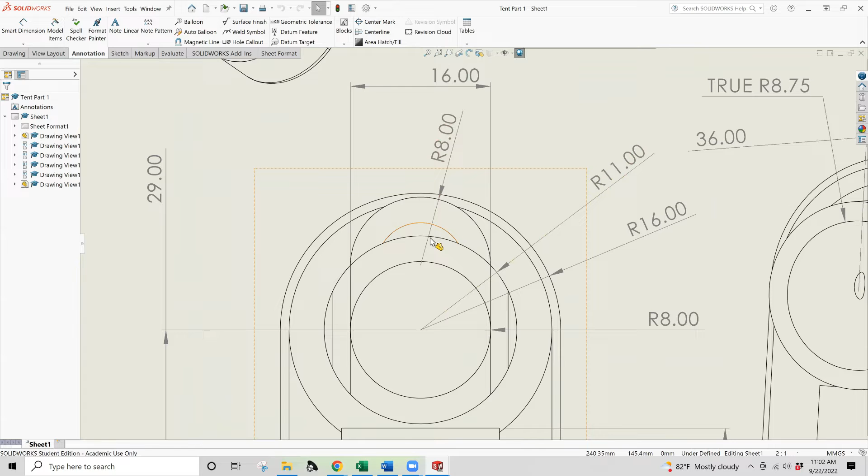So we're going to start by looking for a side view, a top view, an end view, something that gives us information. And we want to pay attention to what these symbols mean and where the arrows are pointing, because all of that information is very important for how something is defined. So up here for what would be a top view, we have a dimension listed here, 22 millimeters as the outside.

Now out here, we have a different value, and we don't know exactly how thick this is from this particular view. So we'll figure that out in a little bit. But one of the things that we want to pay attention to is where this base extrusion is. So we've got our 22 millimeter diameter, and then we have a total length of 62 millimeters. So our overall length for the whole thing is 62 millimeters. So that's what we're going to start with as our base geometry.

All right. So because of the way that things operate, we're going to start a sketch. It's going to be on the right plane. I'm going to change views so that we're looking correctly onto our part. So even though we've specified a dimension here, we need to tell it this is a 22 millimeter diameter circle. Then we're going to need a couple other pieces of information. And this is where you can just hurry up and extrude. But I want you guys to start learning as part of this process.

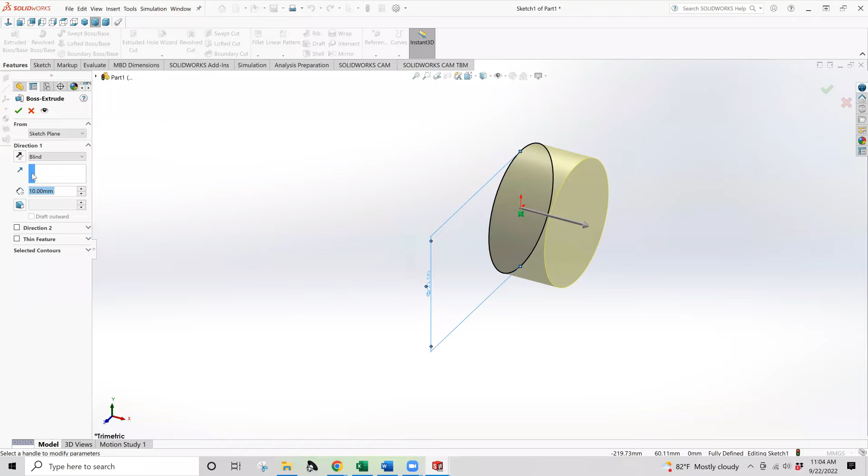Again, we're trying to scaffold different layers of learning into this process, so that you don't really have a sense of all the things you're learning at the same time, but they're all going to work together. This is an okay starting point, but I want you guys to vote in the chat. Is this the best starting point, or should we try and collect a little bit more detail in this first sketch so that we can do more at the same time from a base sketch? Let's take a vote.

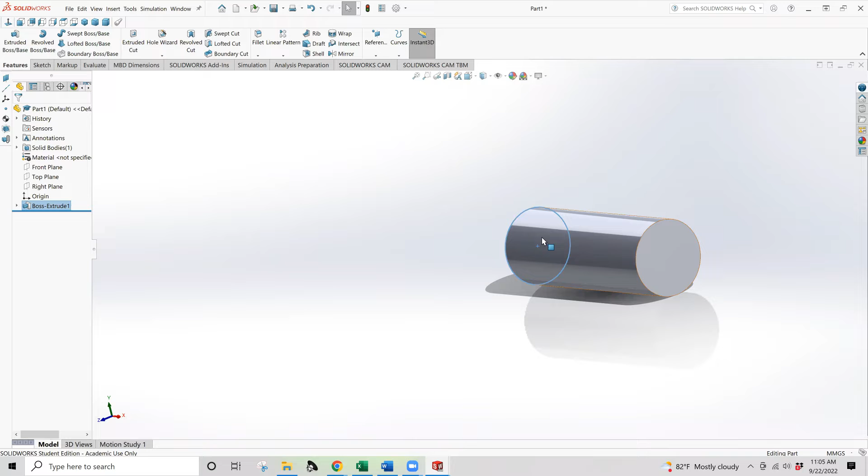Yeah, so we should definitely do a little more detail, right? Because this cylinder looks really not much like our existing part, at least not yet. Okay, so let's go back and edit that base sketch. Again, we're going to reset our view. All right, so we've got our base sketch. We move this toward the center. Here we go. So that stepped me out of the sketch. I'm going to redo our base view here. There we go. All right.

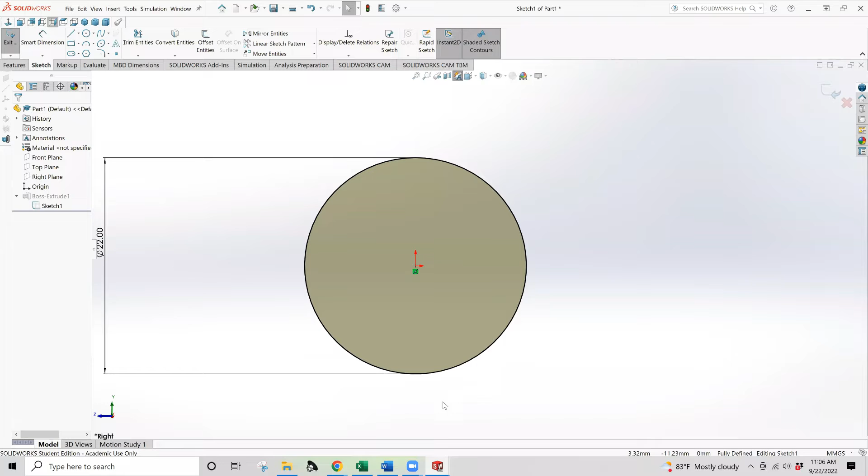Every once in a while, this particular mouse does not register the clicks. Careful with off-brand Chinese mice. Maybe just avoid all of those on wish.com entirely. It's not where this one came from, but I'm told those are not high quality parts.

All right, so we need a couple other features. Other features that we want to include are, let's think a little bit about these two.

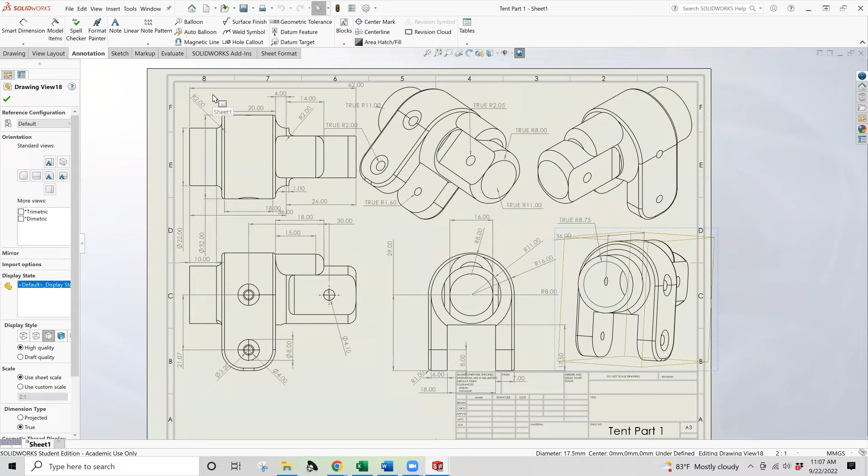So here and here, we have some important details, but we want to think about what is it that makes these so important? How is it that these are giving us information? Well, one of them is we have the radius for this interior, right? So the depth for that first extrusion is listed up here at 62 millimeters. So that extrusion height is 62 millimeters.

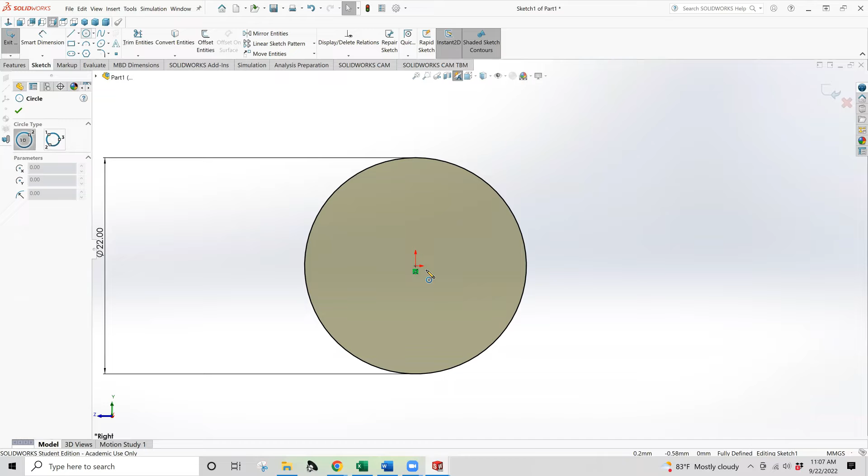We're going to work from this interior or ID, this inner dimension, inner diameter. They're used to mean a few different things, but it's all the internal dimension of that object. If it's a circle, it's probably referring to diameter. So this is 8.75 as a radius. That's what we want to include as one of the next pieces here. So we need our interior sketch, and the radius is 8.75. Now, this gives us a little bit more usable detail. So 17.5.

Now, the next thing we need to do is we need to look and see what our, come on now, there we go. Every once in a while when you're screen sharing with Zoom, it does stupider things than you would expect it to know how to do.

There is another dimension here that's key, that's really kind of hard to see. And that's 36. It looks maybe like it's referring to this circle. And a lot of you on CSWA drawings are going to see something like this and get fooled, but you actually want to pay attention. And I'll zoom in here to make it real obvious what's going on. If this were referring to that circle, so I'll use green to denote dimension, what it would have to do is cross the center point of that circle, which is roughly about there or so. Now, that's not where this ends.

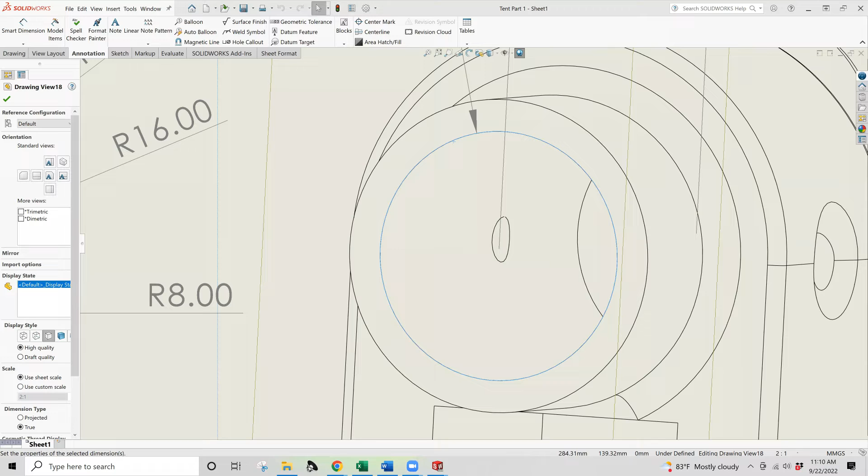This circle, however, if we bring this straight down, so we don't have any jagged lines, and we bring this sort of straight across about the midpoint here, that sure looks like the point right here. That's where this is actually measuring. So this is actually measuring from the center of this inner circle to over here, the center of this circle in the front. So that's actually the depth of cut for this. So there's a couple ways that we can approach this. And I'll show you one of them here.

We can use the same sketch to do a couple things by doing different kinds of extrusions in different directions. So let's look even just at what additional detail that one circle gives us as far as the mechanics of how the drawing is going to work for us. So if we just leave it at this level of detail, we can come back out here and, got to select that dimension, step out of the sketch because reasons. So we're going to do an extrude. And in this case, I'm actually going to edit this extrude. So first things first, I'm going to tell it we want you to take both of these regions,

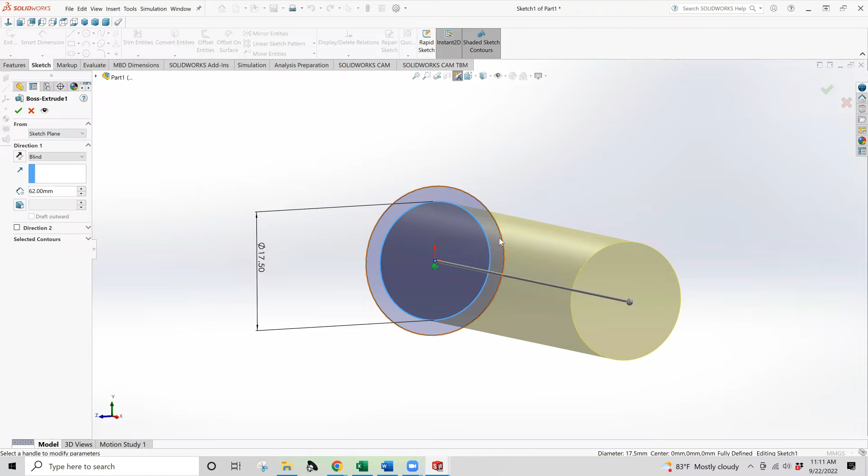and extrude those forward. But instead of the 62, we're going to do a little math. That depth was 36. So what's the difference between 36 and 62? Somebody that's still awake, let me know. Good. So 26. So I've done one operation on this sketch. Now I'm going to do another one.

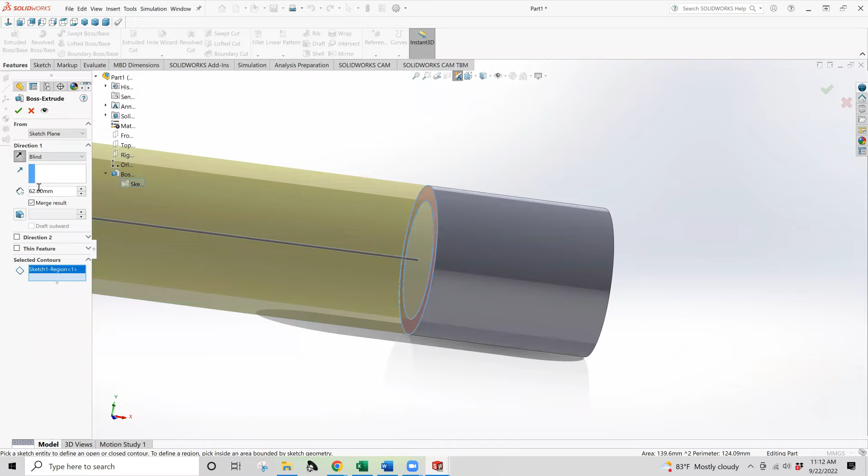And instead of doing an extrude, then coming back and doing an extrude cut, I'm going to recognize what features I need to capture. I need to change the direction of this one and tell this side to be 36. So now I have captured actually some very important details and given myself a reasonable reference point to do some of the next operations. So I want to do now another part of the geometry that we're trying to reference.

Okay. So another part of the geometry that we're trying to reference, which feature do you guys think? Let's take another chat vote. Let's see what feature we should try and look at next. Do we need to do the front cut of the nose, or do we need to try and figure out this whole U-shaped piece business? What do you guys think? What would be your instinct?

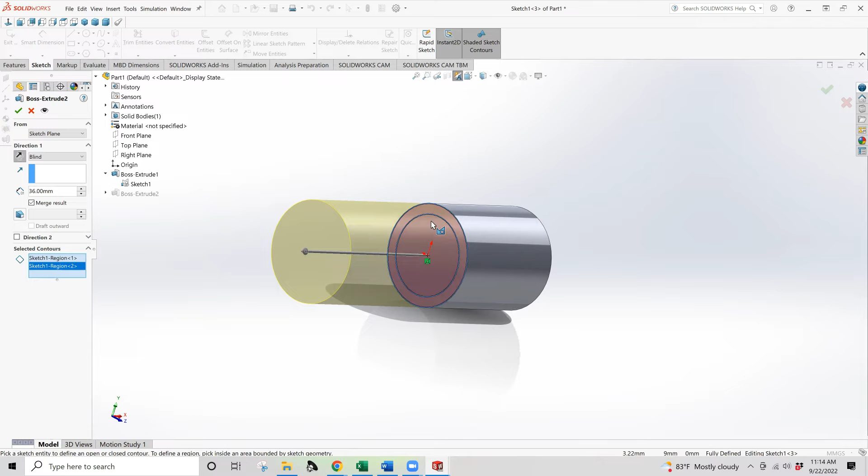So in the extrusion process, where that comes up, we'll look at the U shape next. What you need to do is control by expanding the selected contours. You need to control specific regions, so you're going to have to often hit clear selections and then highlight a specific region for what you want to do the operation on. That's one of the key skills we're going to use over and over again.

As far as dimensions for this, we don't want to start just throwing this on there yet. We want to start figuring out, based on the drawing they've given us, where do we put it. So we know a couple of things.

We know that this 26 millimeters happens to be that difference, so that recessed cut goes all the way up to this plane. That's interesting. But this starts a little ways away, so how far away does that start? Can anyone see it in the drawing? How far away from that center plane do we have to situate some kind of a plane for making this U-shaped object? Good, 4 millimeters. 4 millimeters also tells us something else that we'll come back to, but we'll see why.

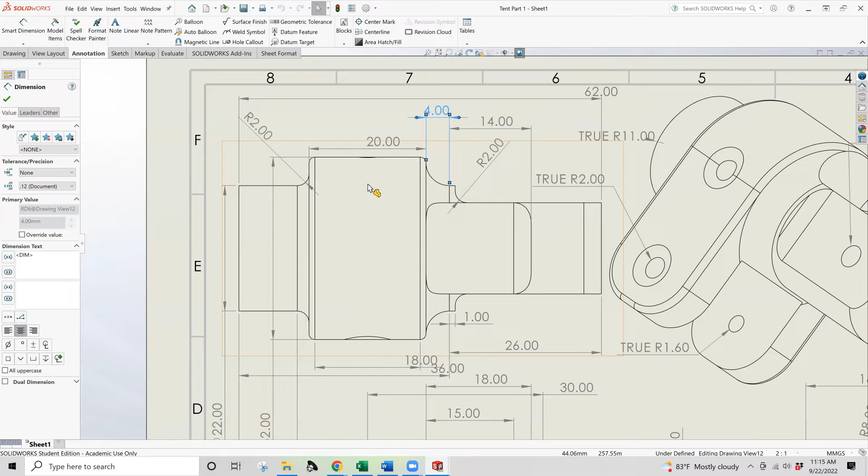All right, so let's do that. Let's set ourselves up a plane, and we need an offset. We're going to need to rotate our view, and we're going to need to reference this, but we don't want 10 millimeters, we want an offset of 4 millimeters. So we're going to say okay. And then we're going to make this just a little bigger so that we can make the features on it that we want, since we're having to make that whole U-shaped part on this.

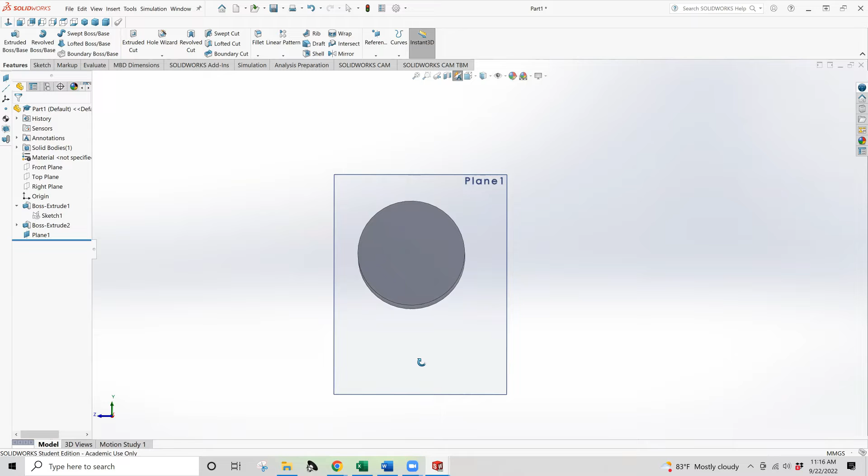All right, so plane 1, we're going to need to recreate this process. I'm going to change the view so that we're working on a square basis. We're going to create a new sketch on this plane, and then set up some kind of a circle, or you could do an arc. I'm going to set up a circle just to give us a couple reference points later, and give a little definition to what we're doing in the sketch.

And then we're going to set up a rectangle, and we're going to reference these points. It will kind of snap to these dimensions as you're scrolling past, but it's a very soft snap. So this is why you want to make sure you have a decent mouse with a decent sensor in it, because you want to be able to actually make use of that snap, since this point is coincident to the circle, and this point is also coincident to the circle, and that's how you verify it's in the right spot. So we're going to need a few different key dimensions.

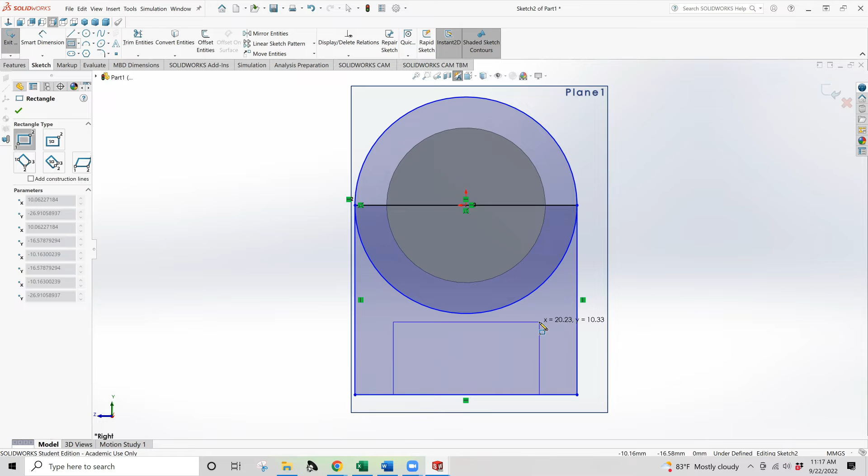We're also going to need another thing, since we know this is some kind of a U-shaped cutout. We're going to need some kind of a thing down there. So we know, even though this isn't centered and dimensioned yet, it gives us a starting point. This is what we're going to work from. We're going to cut out some of the stuff we don't need, like for instance that top bar, this lower circle, and this lower leg. So we're going to need something like this. We'll set up our dimensions based on the drawing, and this will allow us to get a lot of that geometry recreated, but do so in a way that makes sense.

So let's go back to the drawing for reference. We need a little bit of information. First, we need to know how big it is. That happens to be right here - that dimension between these is a diameter of 32 millimeters. That's what those symbols indicate. We really want to pay attention to the difference between diameter and radius - a radius being a single arrow with an R, diameter being a circle across through it. Those become very, very important for understanding.

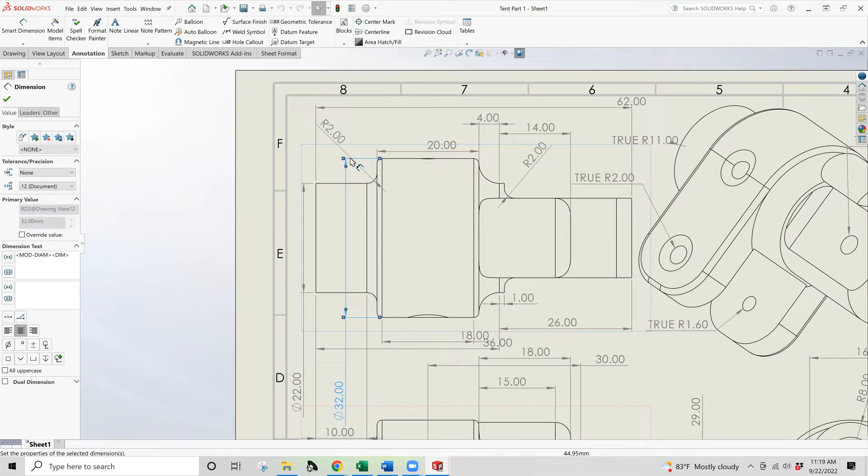A couple of you kind of got caught by that in some of our first early drawings, so just something to pay attention to. So 32 millimeters outside dimensions. 32 millimeters. So here we need this distance. I'm going to have to see about switching out this mouse, because this is creating some extra steps. All right, so 32 millimeters is our starting point.

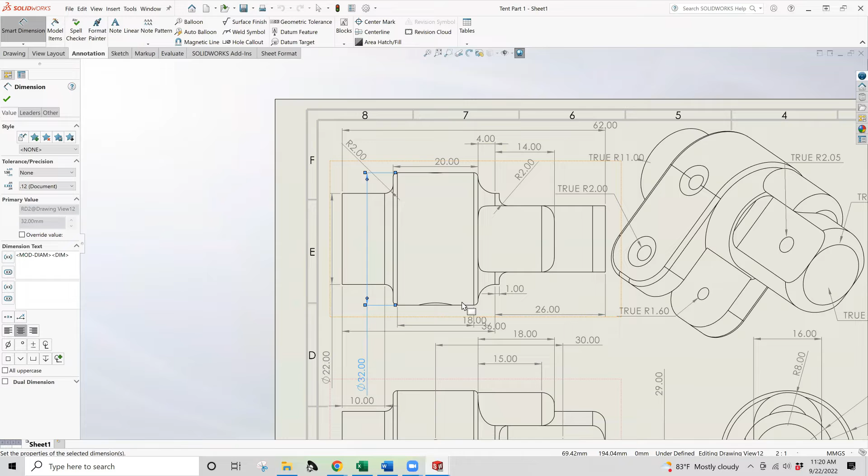Then we need a height - we'll get to depths and what all that business means. We need some information about this: this height at 17.5 is important, and this at 18 is important. So 18 and 17.5, let's do those real quick. Okay, it actually selected the tool this time. So 17.5 and 18.

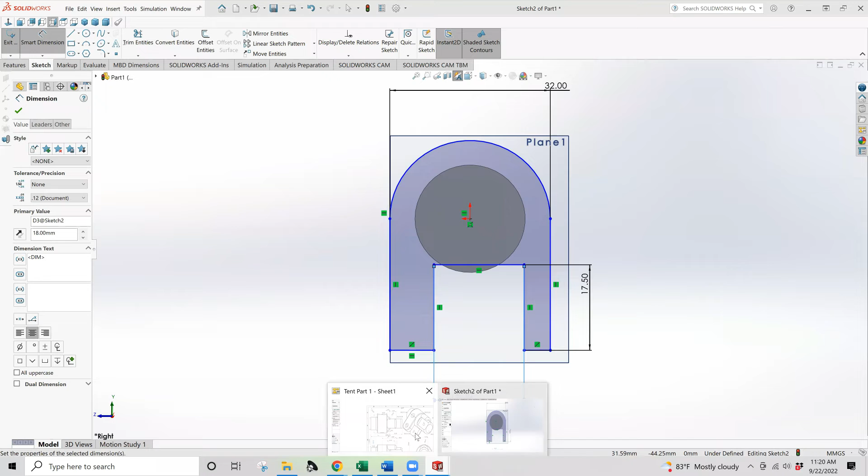All right, so we're looking a little cattywampus. That's fine, cattywampus is a technical term - feel free to look that up on your own time. All right, we've got some of the key information.

This is another piece of information we need, which is 7 millimeters. So we need to set these - there we go, need to set both of these to be 7 millimeters. All right, so this one is 7 millimeters as it ought to be. And now we need to set the actual height here, so where do we find that? Well, we happen to find it here at 29 millimeters. So don't trust that it'll reload those tools correctly every time. 29 millimeters. All right, so now we're starting to resemble the geometry that it needs.

Next, what steps do you guys think we're going to take for this? What do you think are the next steps based on the drawings?

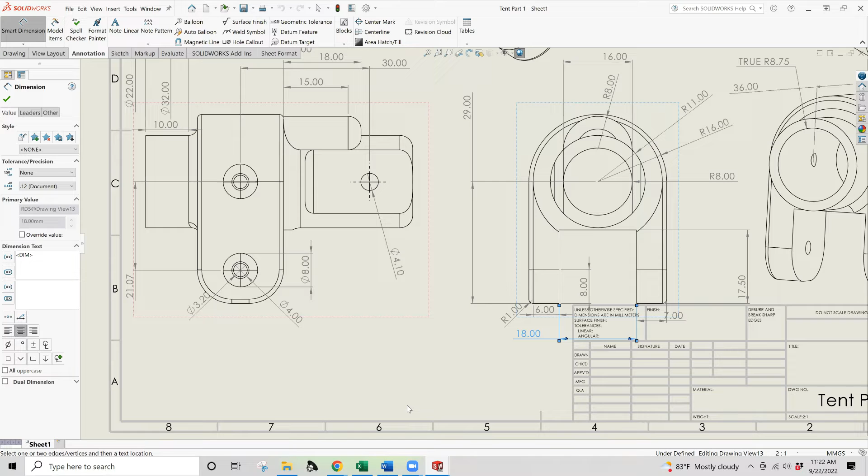Fillet could be... but we've approached it this way a little differently than some of the other approaches might suggest.

Let's take a closer look at our drawing. We need to know the extrusion depth. In this case, it's going to be 20 millimeters.

We want to think about one more thing. We'll do this first so you guys can start thinking about it. I'm going to go ahead and extrude this. Needs to be 20 millimeters.

Okay, awesome. Before I reveal it, anyone figure out what we missed?

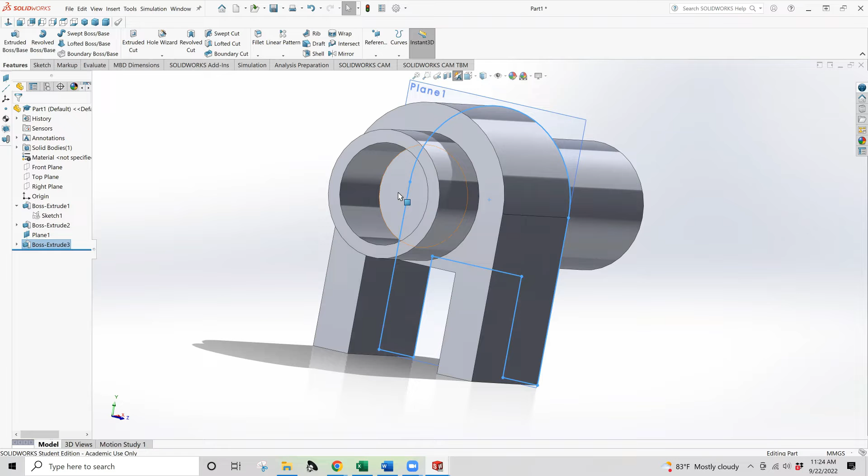Uh-oh, that depth is wrong. So no, we haven't missed the little holes, but this depth is wrong now. Because what did we forget?

We need to change that base sketch to include our 22 millimeter circle. The reason we need to include that is so that the region that we extrude...

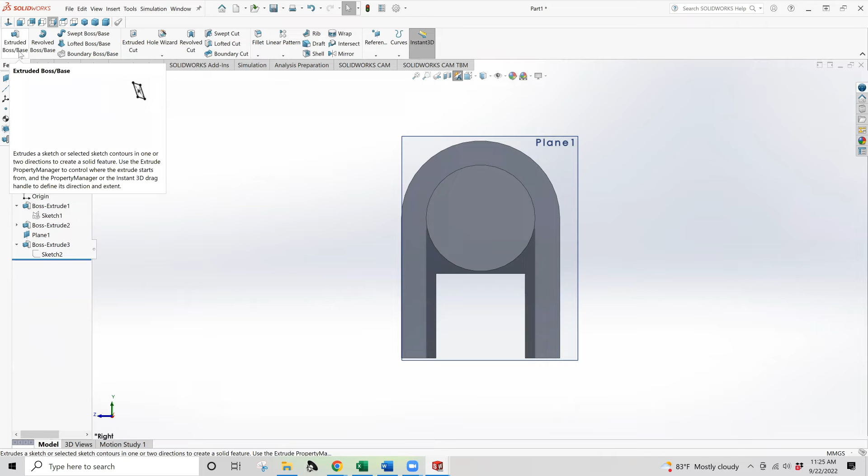I'm going to go to extrude this. Okay, so now we've fixed the extrusion and we have the correct depth. So it's very important to make sure you are paying attention to those kinds of details.

Next, we can start thinking about some of the filleting and some of the other features here. But we don't need to do that until a little bit of a later step, and you'll see why.

So next, let's go back to our drawing and think for a second about what we need to focus on next. We can do the filleting for some of it, we can also do some of the holes now, we can do some of the chamfering, or we could do this nose cut. So which feature would you guys instinctively work toward next?

Would it be the hardware holes? Would it be... what would it be?

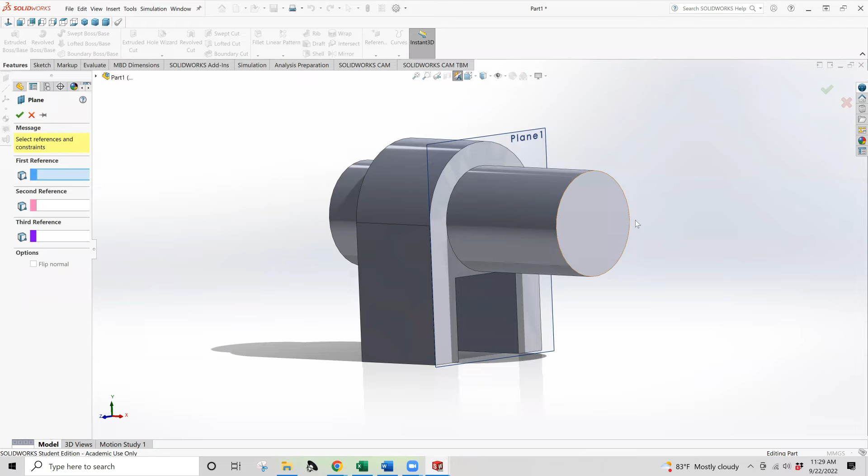So we're going to need another sketch on this front end, and I think it'll become clear why it is that we separated out this process. We want to do a 0 offset plane. We're going to do a 0 offset plane.

On that plane, there was a sketch. And no, I'm not going to break out into song, as much as that would entertain most of you, but embarrass those of you trying to attend class in public. And then we're going to do a center point rectangle, because it'll be a little bit easier to manage.

So we know the distance between these needs to be 16. The height here is a little less important.

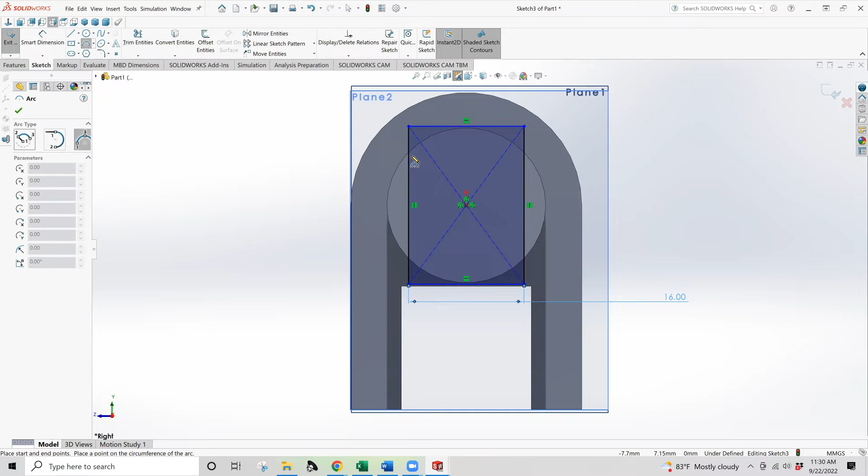We are going to need an arc. In this case, I'm going to use a 3-point arc instead of a center point arc. A couple reasons why that is, but we're going to bring this down to be concentric. I'm going to follow this curvature.

What I'm doing with the mouse is trying to highlight this curvature and reach this line at the same time, so that I'm intersecting roughly where that curve actually is. But again, since these are geometric approximations, they're represented by polygons, not true circles.

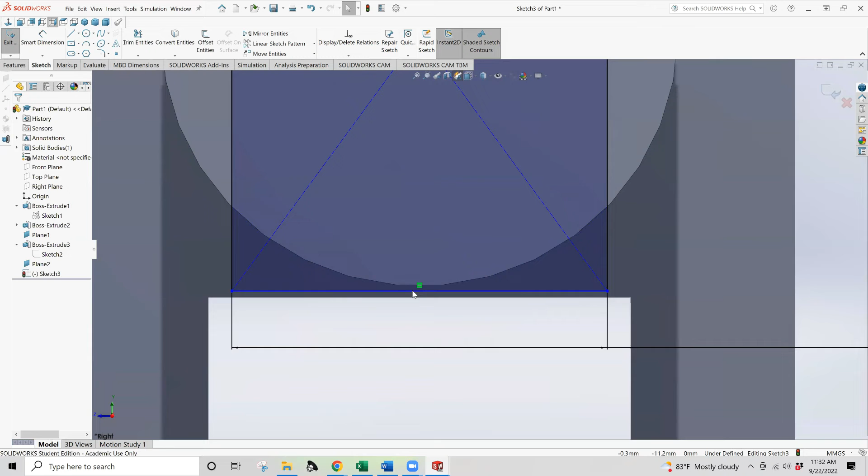So there's our first piece. We need the same thing down below. We'll bring it in, and it's smart enough to know what association we're making there, but we have to be careful with our referencing. We want to make sure this is touching along this arc, which, interestingly, we lost the association there. Let me go back and redo this.

These can be a little tricky to get references on an already extruded body. So I guess, let's see if I can force this. All right, maybe not.

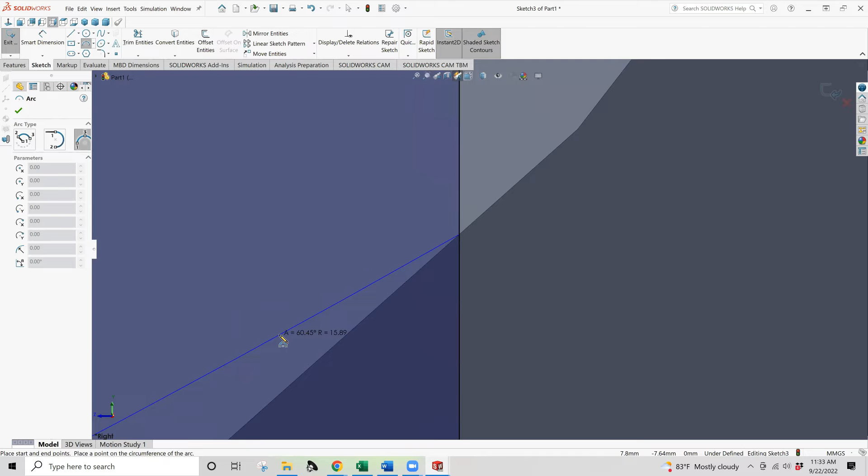We're close enough that the software association for these points is going to be pretty close. So I'll have to estimate it here because I've lost the reference point. You can sometimes come back and force it by finding a midpoint, or usually find an arc if you've made that reference elsewhere, but in this case it's giving me a little trouble. So I'm trying to show you a few different approaches to how to do this.

We're not going to need a couple of these items. We'll come back and redefine some of our dimensions, and get rid of our reference lines since we aren't going to need those. All right, so we have our first enclosure.

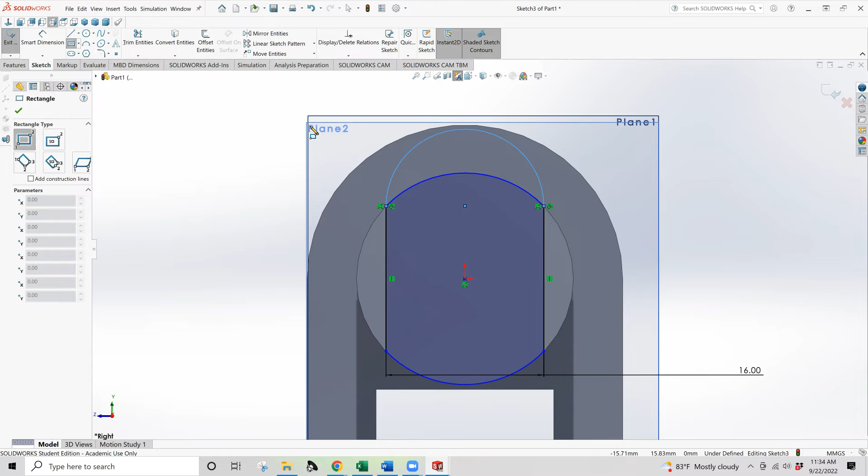Now we're going to do another 3-point arc that comes up from these points, and this one will set a radius — we'll get all that key dimension information from our drawing. We're also going to add one more geometry, a corner rectangle. Think of this as the negative space we'll use as a cutting die, so we need an enclosed volume for this to work and cooperate.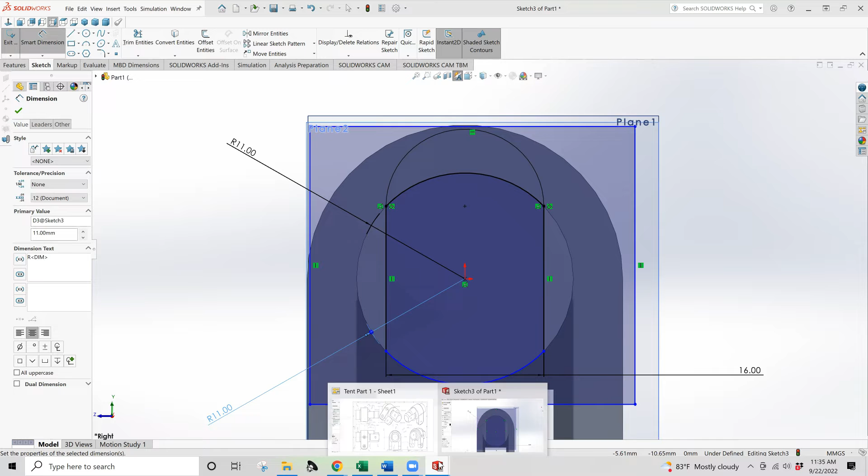So we've got 16. This arc should have a radius of 11. This arc should also have a radius of — yeah, 10.95, not quite, not quite, should have a radius of 11. And this separation distance should be the same. Okay, so this one is going to have a different radius. Let's take a quick look — a radius of 8 millimeters for this outer circle.

So we'll go back to our drawing. We'll deselect and reselect the Smart Dimension tool, and set a radius of 8. Because of the 16, this is already defined — I just happened to get it to the right exact height, which gives these... this isn't quite the midpoint, but really, really close if you look. So that's why this is coming out dimensionally the way it is.

All right, so I'm going to step out of this particular tool. One other thing to pay attention to is setting a smart dimension — that one has the information for it. So I want to check one more, to see if it has the information for this direction.

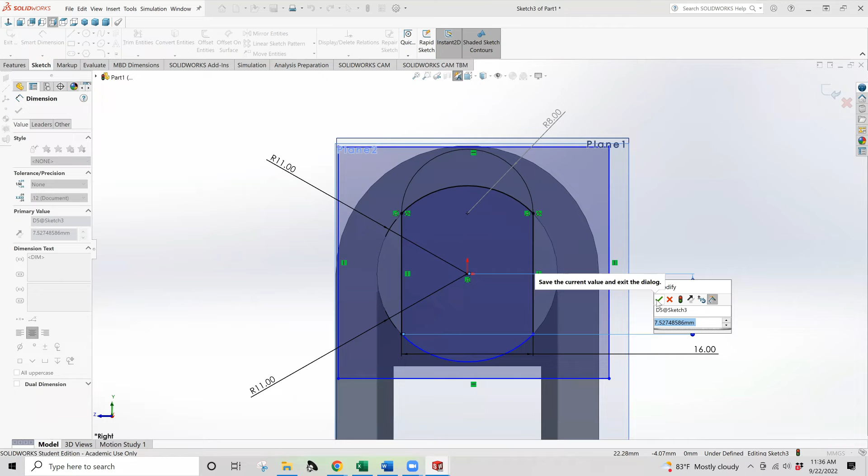Yeah, 7.52 is okay. What we did by adjusting that radius is change where this endpoint and this endpoint of the arc actually interact. So this one is correct — the other endpoint might be very, very slightly off.

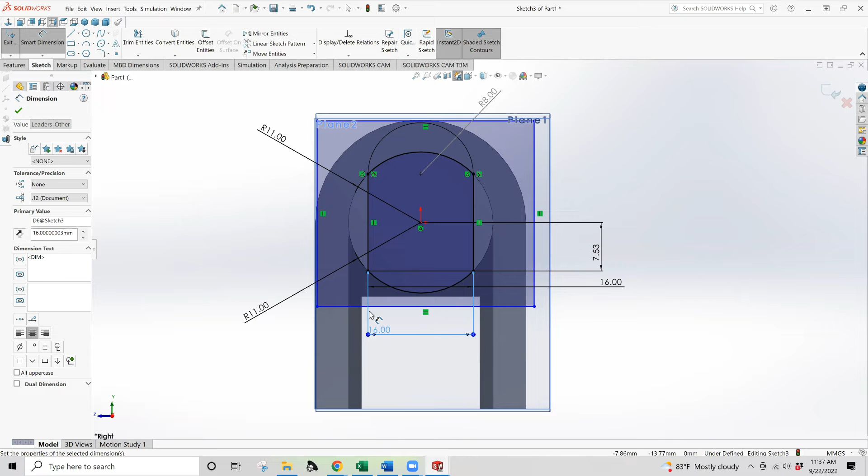So we've got key information here. This should be an over-definition, but because we deleted the lower reference point for the arc to enclose the rectangle, and deleted some of the center point data, it needed additional definition — even though we know that distance for these lines is 16. Now we know the distance between these two points is 16, so it hasn't caused a misalignment or anything like that.

All right, so we've got full definition for that part of our sketch, which will be important here in a little bit. That detail allows me to get some of the last things I need to show for this geometry.

I'm also going to make, I think, one more version of this — one more modification for the real-life part, because I think I see a weak point in the design for a printed material versus an injection molded material here. At the moment I no longer have the fancy resin printer where I can get nice isotropic properties, but that could change before too long. So let's take a look at this.

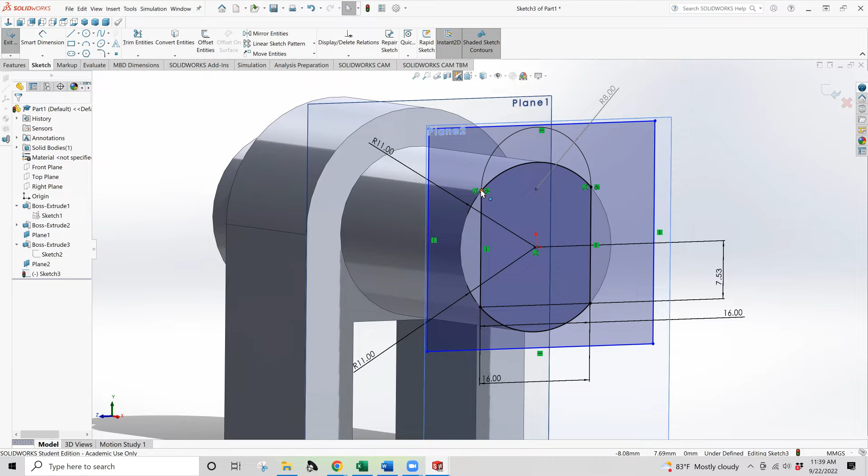This section — what's this going to do, and why did I do it this way? This section is going to allow us to do a cut, and there's a couple ways we could go about it. I'm just going to make a cut this way. We need to make the depth of that cut 26 minus 1, so 25 millimeters.

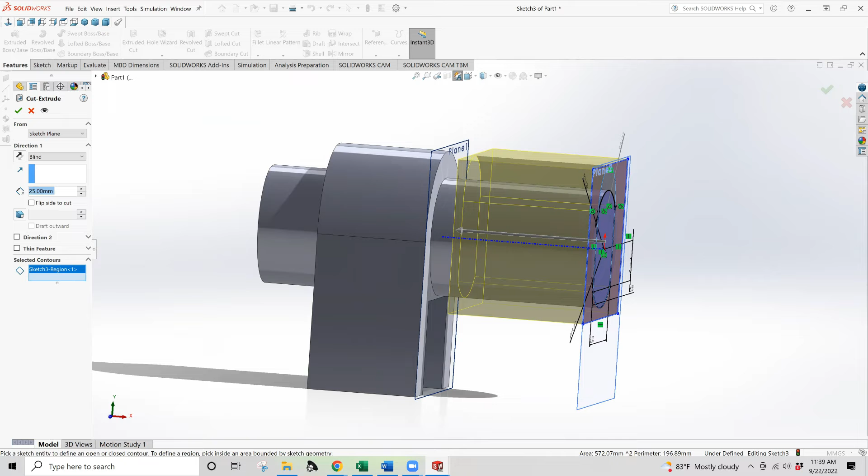Now, I'm going to go ahead and make that cut 26 millimeters, and you'll see why I made a minor change from the real life component. So if I do 26, what do we see? Daylight. Broadly speaking, in 3D printing speak, if you see daylight in components that are meant to be supporting a joint and they're going to have a lot of stresses, probably a bad idea.

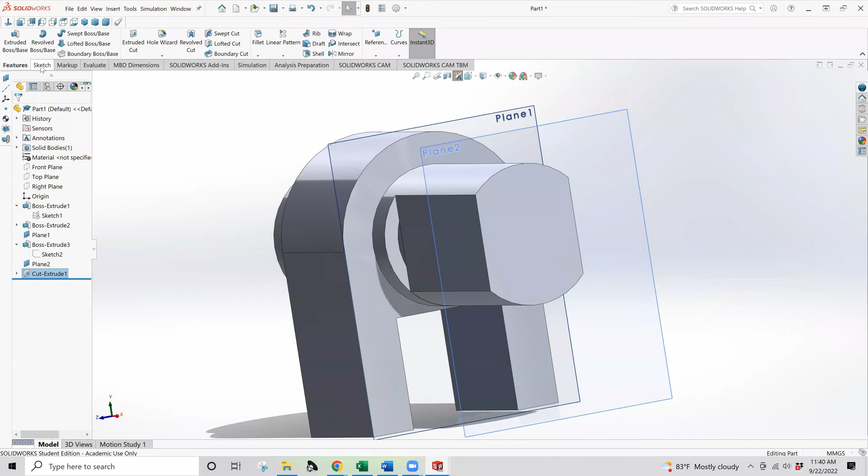Skeletonizing or lightweighting 3D prints isn't often the right way to go. I mean, it's fine if you're doing certain things, but if you have a real mechanical load, say, wind loading on a stressed joint for a tent, for instance, you really don't want to see daylight.

So I made a slight modification there, added some material back in by going just 1 millimeter shy and changing this radius to be a couple millimeters so that at the thinnest point, I should have approximately a few millimeters of wall, which is quite a bit stronger than being able to see through it. So a fillet would have rejoined the material, but not as nicely.

So we did one operation. Now we're going to do another one from that same sketch. We're going to do an extrude, but this time we have to go the opposite direction, but we can leverage the geometry that's in that same sketch. So we're going to do an extrude here. The problem is we can't do it from the sketch plane. We have to pick another face.

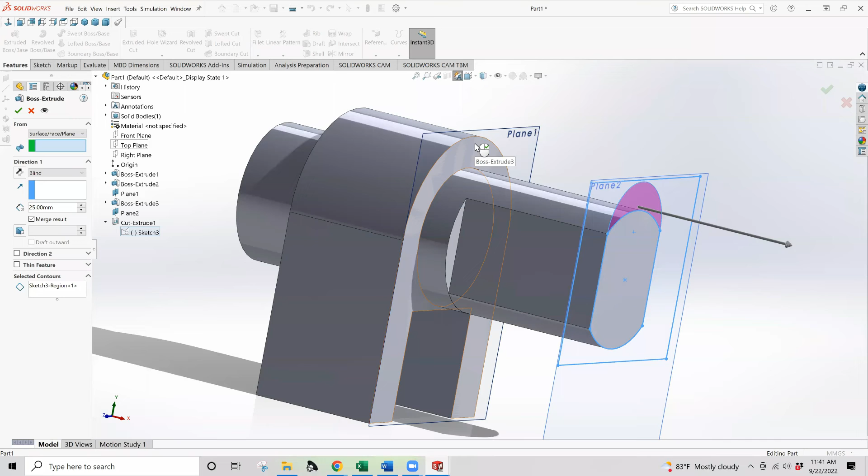Now, this has an extrusion depth all its own, and I'm going to set it to be 20 for right now. We're going to come back to our drawing and get more accurate dimensions. All right. So somebody who's good at math, what's my actual extrusion depth for this? Because it's not 20. What is it? What's the actual extrusion depth for that top feature?

Good, 18. So at least one person is still alive and awake. That's a good start.

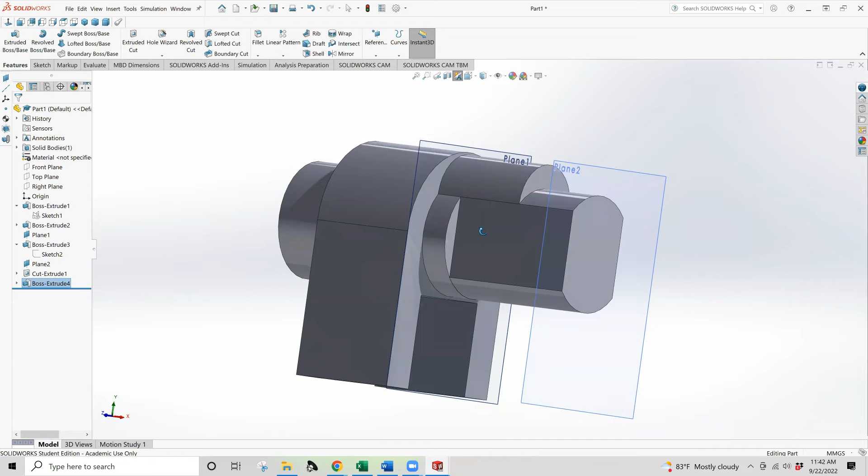So 18 millimeters. Now, when we go to do some filleting, there's a few things that we're going to find. So we can do some of it, but we're going to see where we maybe have missed a step here. So let's start doing some filleting. So we know there's filleting on this outer edge all around this U piece. We know there's some filleting here on the sides.

Okay. We know that there's some here at the back. We know that there's some here at the front. So when we're talking about this, what fillet data can we find here? The answer is actually quite a bit. So we see a radius of 2 at this fillet, a radius of 2 at this fillet. We see this thickness of 4 millimeters. What are your guesses as to what the radius of that fillet is, since I didn't measure it directly?

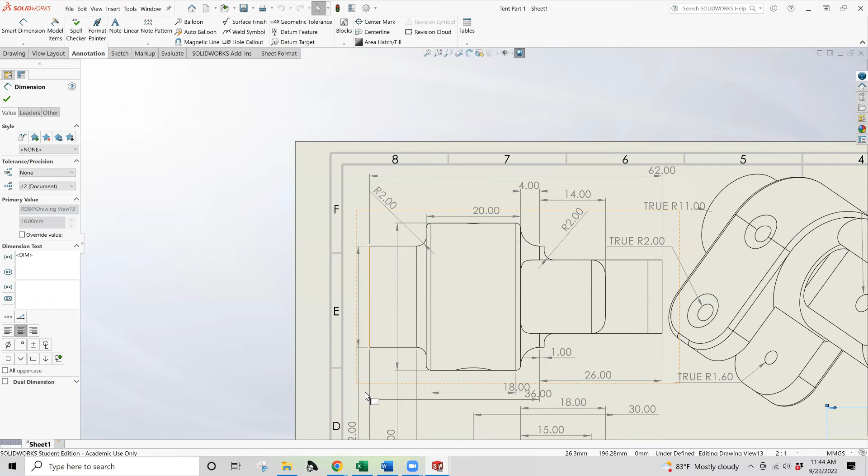Then we see 20 exterior, 18 interior. So we know what this radius is. But what do we think the radius is for this fillet? Good. The fillet happens to be 4 because I decided I wasn't going to be as mean as I could be. So we're going to add a fillet.

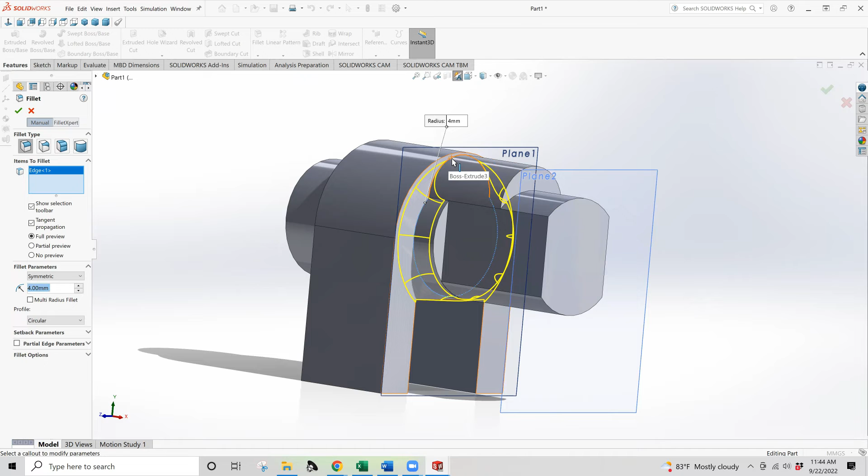We're going to do 4 millimeters, and we're going to go all the way around here, and we're going to select these edges. Now you can do a couple different things with how this is done. And if you select both of those, let's compare this real quick to our actual part. So let's actually do it here in this view. So let's move our part to make it a little more clear what we're comparing here.

All right, so if we go back and forth between our drawing and our part, I guess it's a little bit more shallow like this. Okay. So the difference is that fillet only goes to this edge. Okay. So we've got to make changes.

If we delete that second edge, we can recreate this. What's another way that we could create that fillet before this part is in the way? Anyone know? We're going to redo this.

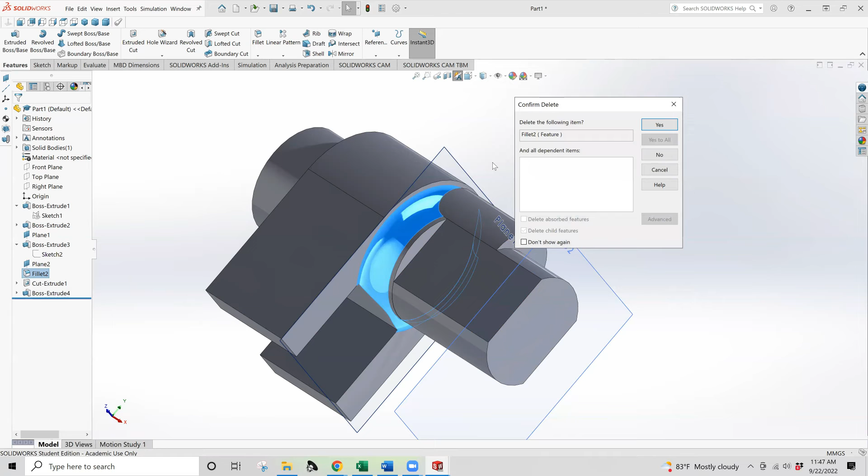So I'll undo this and I'll redo a fillet. Now that we have that part, it is a little different than what I showed on Tuesday. But up here, you select which items to fillet. Because I could run around and just go edge happy with 4 millimeter fillets. The problem is, on a corner like this, you could select a 4 millimeter fillet. However, you can't do that and also this, because that would create a confused geometry. So we want to control each time we're doing an operation what that looks like.

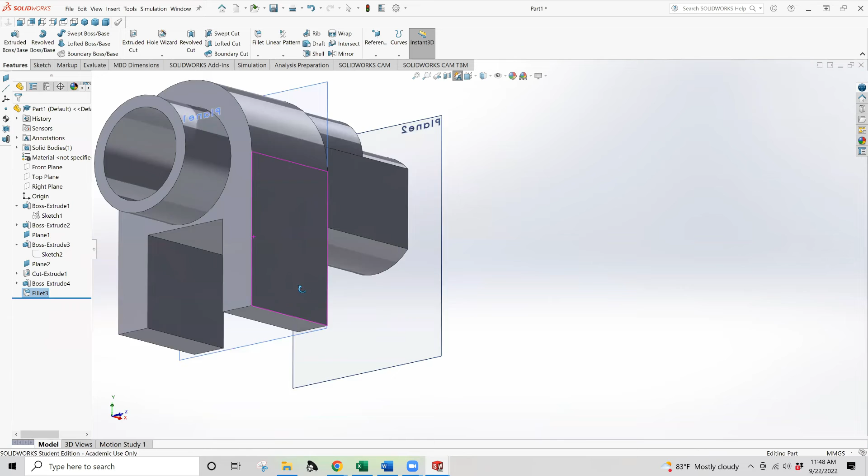All right, 2 millimeter fillet for some more of these parts. So here, this is instead going to be a 2 millimeter fillet because of what we've seen from our part. I have to complete that before I can jump back over and take a look. So we have a 2 millimeter fillet. We have our 4 millimeter fillet. We have another 2 millimeter fillet on either side here. And then we have a collective 2 millimeters worth of fillet here, but they're actually a radius of 1.

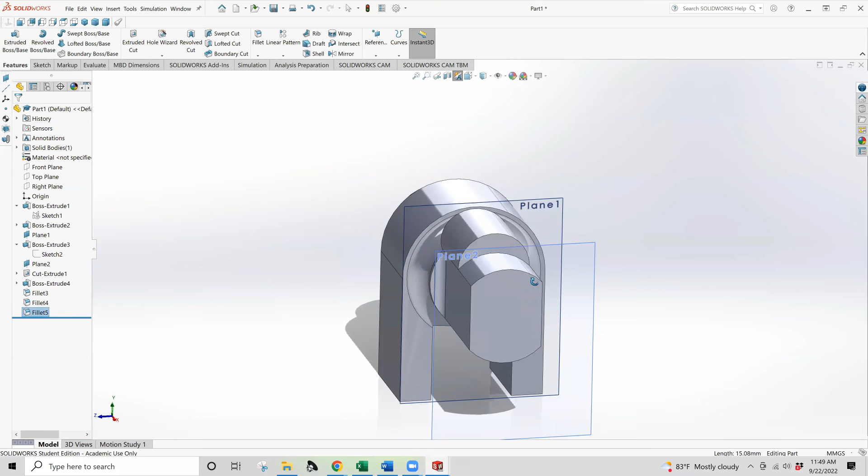So when we go back to our part, we can do a couple more of these pieces. So right here, we want to select these edges. So that one is a 2 millimeter fillet. So now we have a smooth transition, and that will help to reduce some of what's called stress concentration right at that point. You'll learn about that in the materials classes that you'll take later. Stress concentrations are going to do a couple different things and make your part vulnerable to breakage.

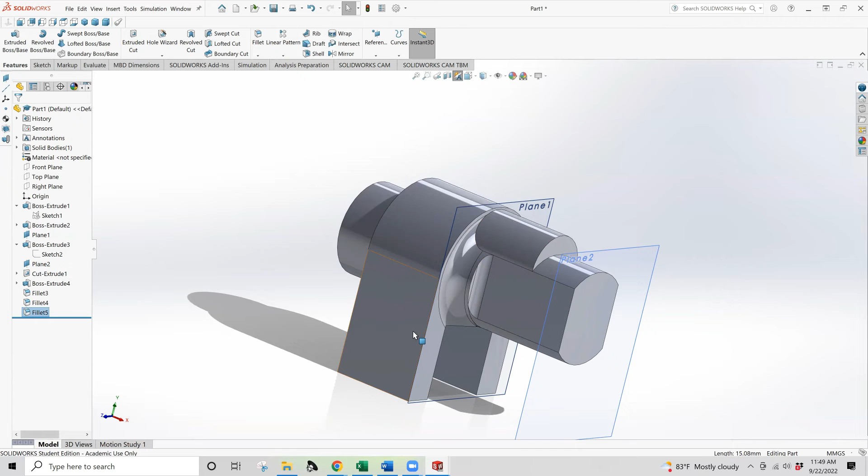So that's why I had to change the extrusion depth right there and increase the size of this component so that it would actually help reinforce the overall geometry in all these different types of bending loads that wind forces are going to subject that part to. So we also have these bottom edges, and we need to select. So often you want to zoom in and select them manually for a fillet. Question is, we're going to have to determine how big a fillet. So we'll go back to our drawing and see.

So maybe it was about 6. I don't know. Maybe that's right. Let's go take a look. No information here. No information here. No information here. Aha. This one tells us that that line starts about 8 millimeters up. So that transition in geometry. So that's how we know we have a radius of 8. So our radius actually needs to be 8.

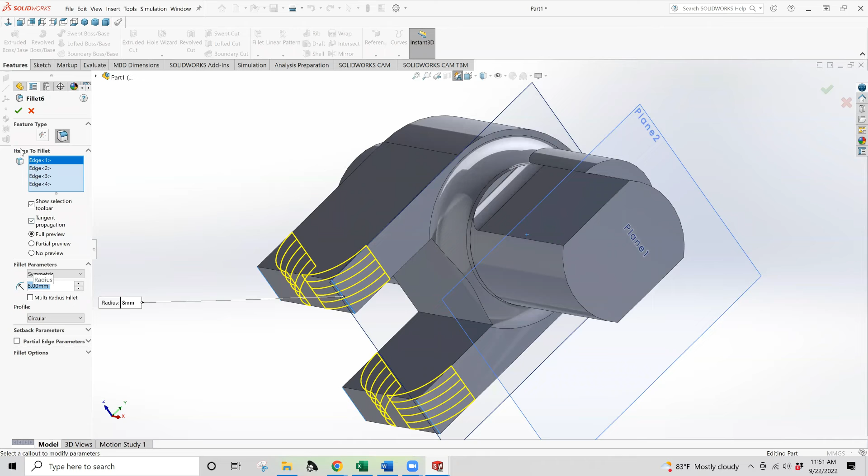And on the real part, it's just a little steeper than that. So it's pretty close. The radius is probably actually 10 because it does come to a rounded curve at the bottom. But for this purpose and being a printed part, I want to make sure I've got just a little bit more material supporting in the thin areas than the original part did. So I have to play around with a couple geometric realities to try and make sure that this 3D printed component will be able to last.

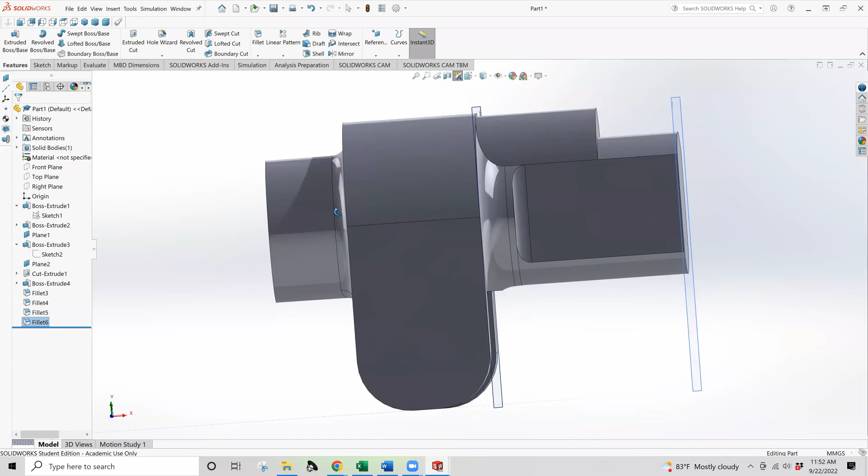So the thin area here, it does have quite a bit of tube recess into the center, but I'm concerned about the wall thickness here not being sufficient in an additive manufactured part to be able to replace and serve for the same length of time and the same duty cycle. So that's what we're going to change before this part is done. And then I'll print a final version of this and see if I've got the extrusion settings just so.

All right. What we want to pay attention to next is, now that we've got that big part of the geometry, we can do this fillet. So if you select this edge, it'll do the whole thing. 8 millimeters is going to be much too large, but 1 millimeter you can actually manage. And what that does is the 1 millimeter smooths out all of those edges.

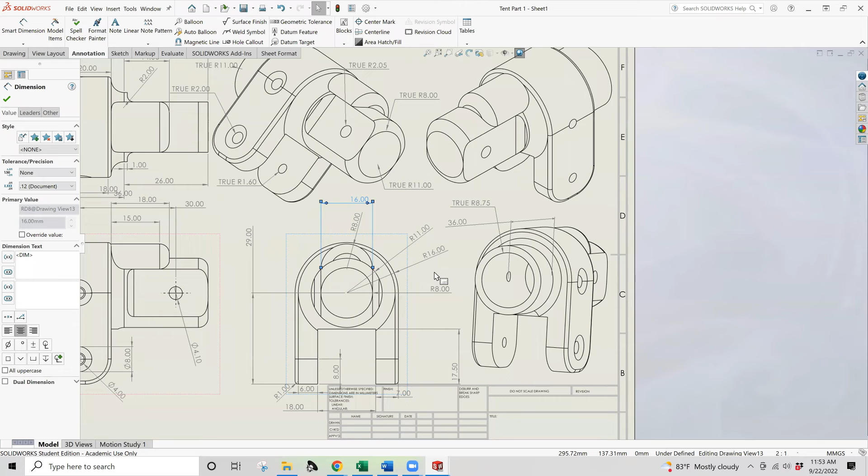So by the time you're done doing the additive manufacturing, similarly to mold making, you don't necessarily want lots and lots of sharp edges. That's very bad in mold making. Very hard to get sharp edges, and overhangs, while doable and possible, are even worse in molds. Sometimes you have to destroy the mold to get the part out, and that's kind of stupid.

So this one has a radius, the difference being 15 and 18. So the difference being 3. That has a radius of 3. So we're going to do another fillet on that part. This is going to be a radius of 3. And the radius for this could be more aggressive. I could have done a much longer taper and still gotten close to the same strength.

I'm just trying to make sure that in this geometry, any kind of torsional load or any kind of bending load is going to be translated from this hole into the thickest part of the print. And that way, in either direction, there really isn't any kind of bending moment that's going to overcome the strength of materials or strength of adhesion of the material itself. So there'll be some kind of R&D on the part of my end user to see which one actually works and holds up under the constraints.

So let's see, we've got a couple people dropping off connections. Okay, I think we're back connected to audio again.

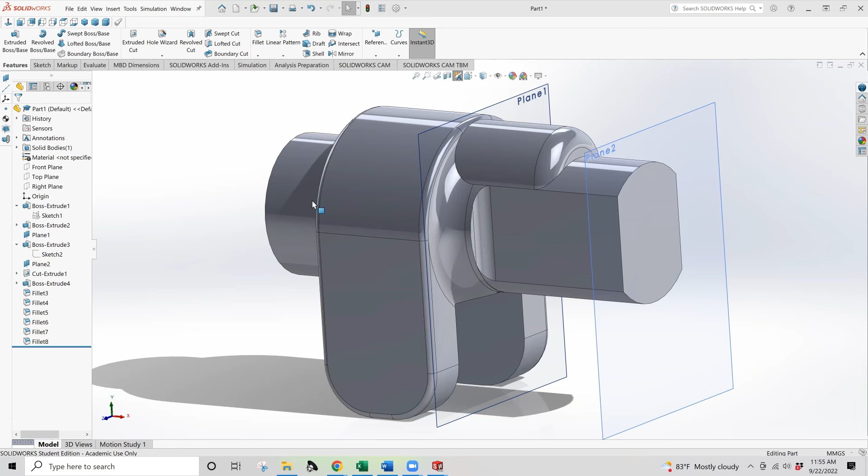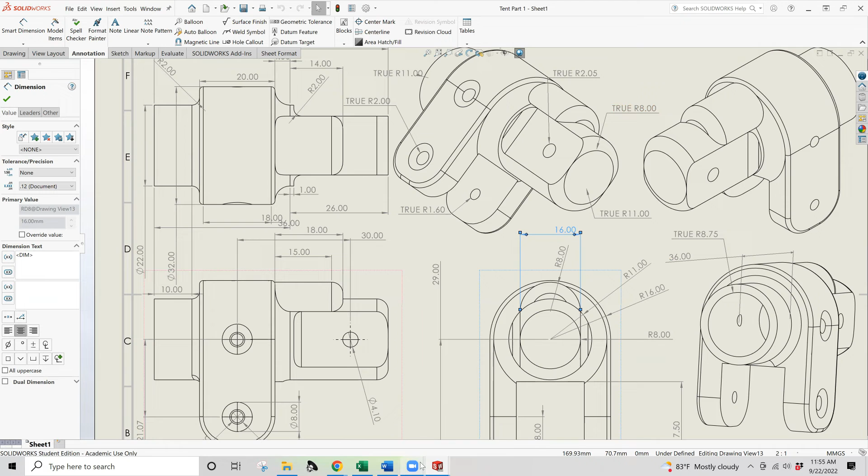All right, so what we've got for the last part here is we're going to have another fillet on this nose. So the fillet on the nose, we have some information about right here. The radius of 11 is the exterior. The radius at the front is 8. And so this gives us another 3mm fillet at the nose. So for the top and bottom, we're going to use the same 3mm fillet.

Again, on the real part, it's a little bit more aggressive. I think the actual is somewhere around not quite 8, but maybe closer to about 6 is the real part. But because this is a key hinge point, as long as the clearance is okay here, 3 gives me a lot more material to support any kind of shear loading so that the pin doesn't break. So again, very slight modification to the base geometry.

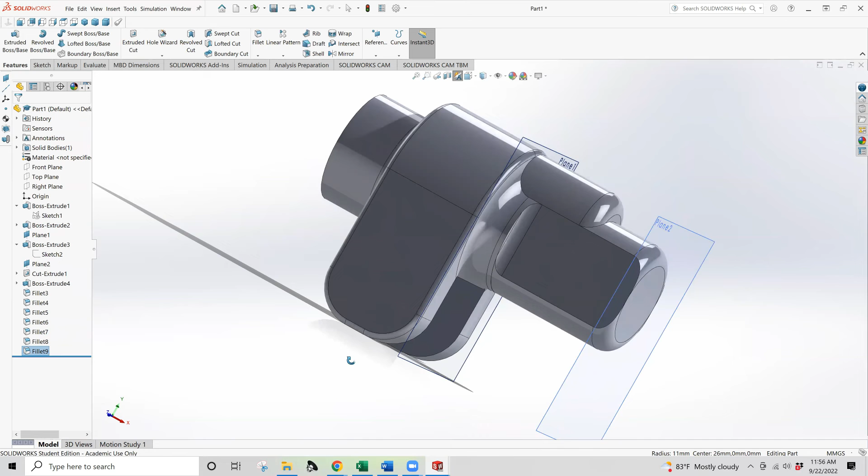All right. So we've got a lot of our features recreated now. And if we compare it to our drawing, we're starting to get pretty close. Okay. So what are some of the final steps here? We want to make those holes and we want to set up that pattern. So let's take a look and see what we would do next. We want to add one more plane on this side. And I'll set the view so that everything is square, make life a little easier. And we're going to set it as a 0 offset on that drawing face. So this is going to be plane 3.

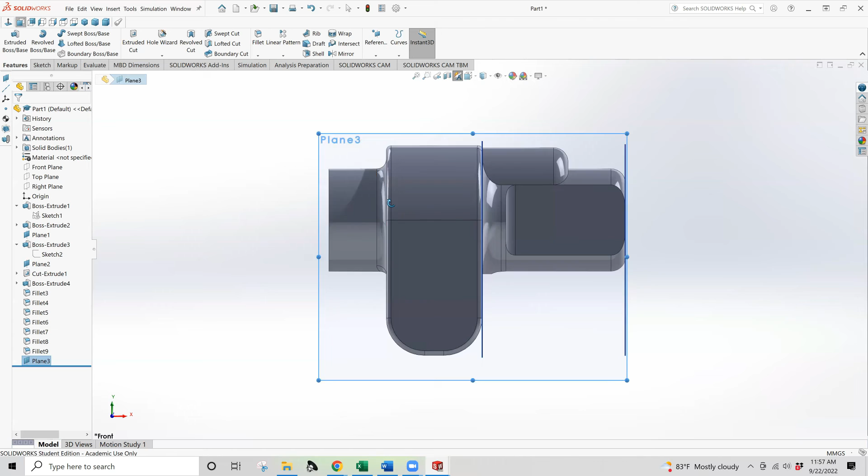Okay. Now, this part, I think I'm actually going to use the fillet to do something creative for that last step. So we'll come back to that. I think instead of changing the base geometry here, I'm going to do a fancy trick with the fillet where we're going to use the asymmetric property to do the modification, because I think that'll be a fun way to do it. All right. You know you're in danger when your CAD professor says we're going to try something fun and different.

Okay, center line. These become very, very important for a lot of reasons. I'm going to cheat and use the center point here. And then my vertical reference. I'm going to do another center line. Remember that there is a big difference between lines and center lines, so you can't actually complete the geometry with, I think this one actually does need to go through the origin. If I remember right, we'll double check against the drawing. It's designed to locate these pins where the material is going to be strongest, which should be the center line of that axis. But there might have been a slight misalignment on one of them, I have to remember.

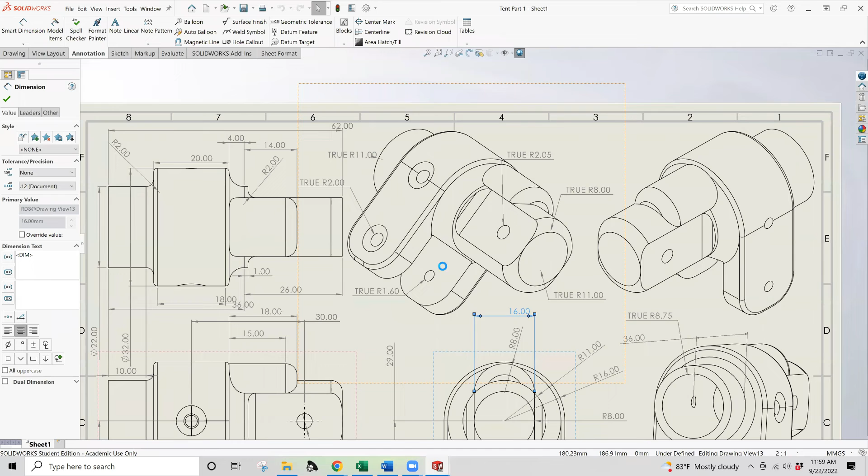So this, I can't really cheat. I'm just going to use that vertical reference to make sure that these two are perpendicular. And then I'm going to have to set a couple dimensions as far as the spacing goes. So here, yes, this is right at the center line. There are a few different holes. Again, there's a reason for this, and we're going to figure out what that is. We're also going to do a real quick assembly creation from this part and see what we can make happen there.

Center to center separation of 30 millimeters. So let's do that. The center to center distance becomes a very, very important one. All right, so 30 millimeters. Now everything is defined. All the center lines are defined. It knows where everything is, and we're going to create our base geometry. So we have 1, 2. We have down here.

This one also has a set separation distance. I'm going to use a centerline reference to do this one as well. I'm not going to associate it with anything other than the horizontal reference right now because reasons. I'm going to go ahead and add this front circle. So be careful not to grab the midpoint of that center line. You want to grab the actual intersection point, and 2.05 sets our base geometry. So this is a 4.10.

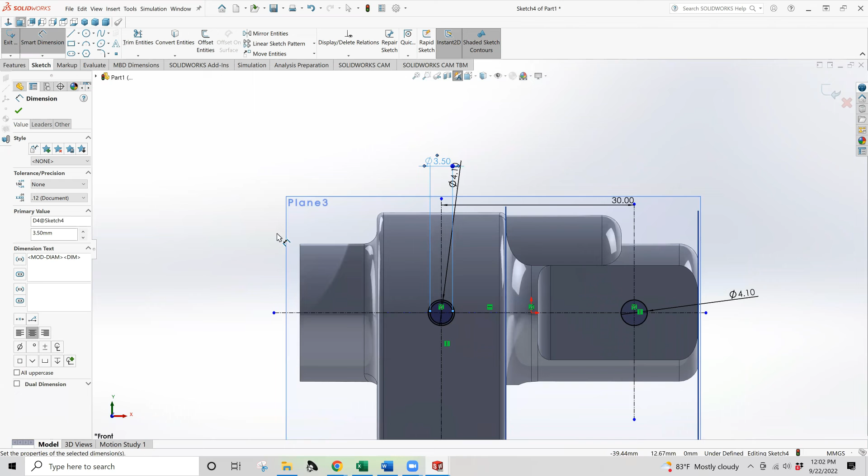All right. So 3.5, I can probably even get away with 3.6, honestly, but we're not going to worry about that right this second. I'm actually going to tap and thread the other side of those holes. Let's check the separation distance, center to center. For this guy, 21.07.

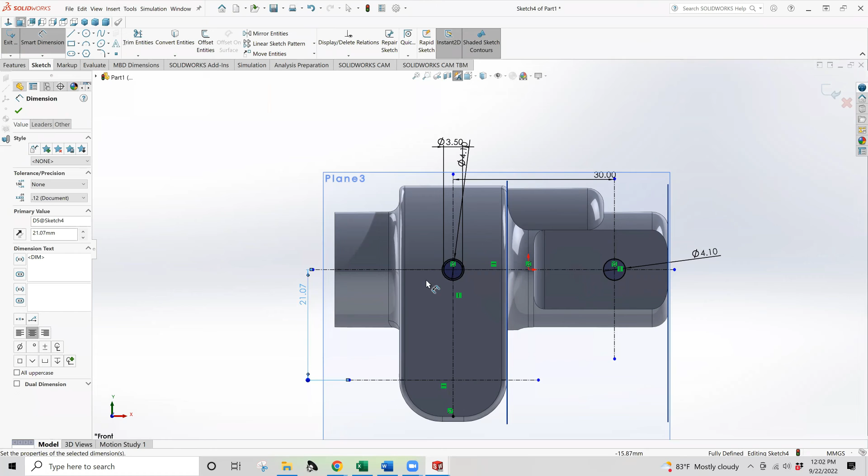So since this part's not going into space, the dimensions are, while important, the 0.07 versus just 21 is not really all that critical. There's going to be some measurement error by eye. Okay. There we go. All right. This one, same deal. We're going to do 2. We're going to set those with smart dimension. I'm going to do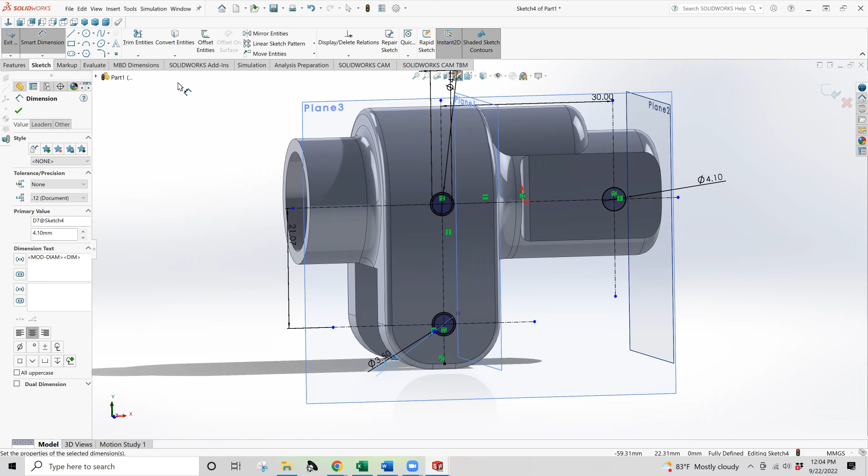3.5. What the 3.5 is going to do is give me a little bit of material to actually cut threads into. And this outer hole is going to be a clearance for the hardware. So I need the inner hole on the opposite side to be threaded, and the top hole I need to be chamfered. So we're going to see what that looks like. Chamfered for countersink of the pan head of the screw hardware that's being used. So you'll see what that looks like. All right, we've got enough detail.

So now we're going to do our extrude cut. So we're going to start with an extrude cut. Notice that especially for these sections, it's doing an extrude cut of that annulus. That's actually not what we want to do. So we want to select the contours. We want to deselect the sketch in its entirety and say, actually, we want to do the interior volumes or the interior area. And then we're going to do a special kind of cut called a through all. So that's going to be cut 1.

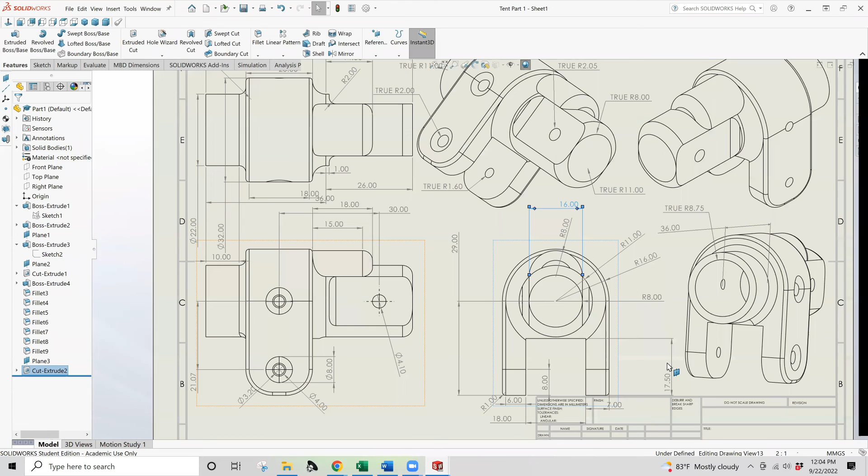Now we're going to do a second cut because we need this diameter to be a little smaller than this one. And there's going to be some assumptions that you have to make on any of these kinds of projects. So I'm going to do another extrude cut. I'm going to reference that drawing again. And now I'm going to do the annulus cut, but I'm not doing the whole sketch. I'm only doing the annular regions here. And I'm not going to do a through all.

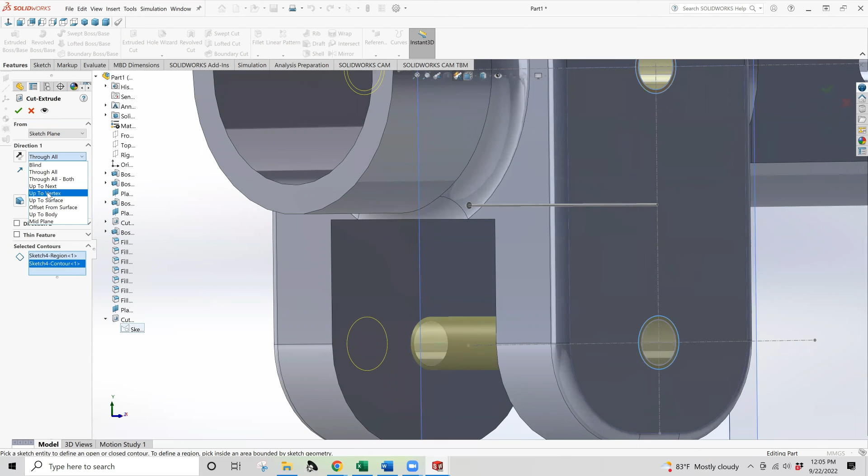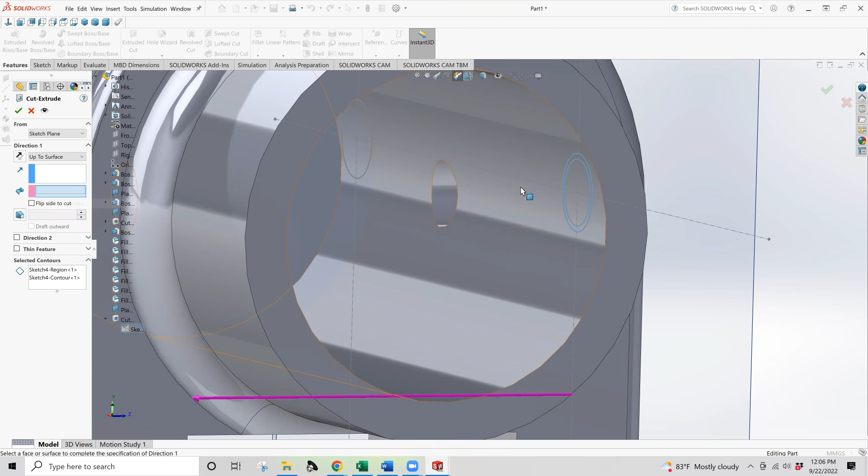I'm going to show you a couple different options. You can do up to surface, and you could click this surface. The problem is up here. If you did that, you're not going to get the through hole all the way through, and your hardware is not going to fit the way that you think you can. And you can't just go, okay, well, since that one's farther, I'll just click this face, because it doesn't understand how to do up to that surface of the cylinder exactly with this one. It could if it was just the one, but it can't with both. So that's not going to work.

So you could do up to vertex and say right here, but it has to actually find a point there and really, there we go. To vertex. So it won't allow you to select that one. So what you actually want to use is up to next.

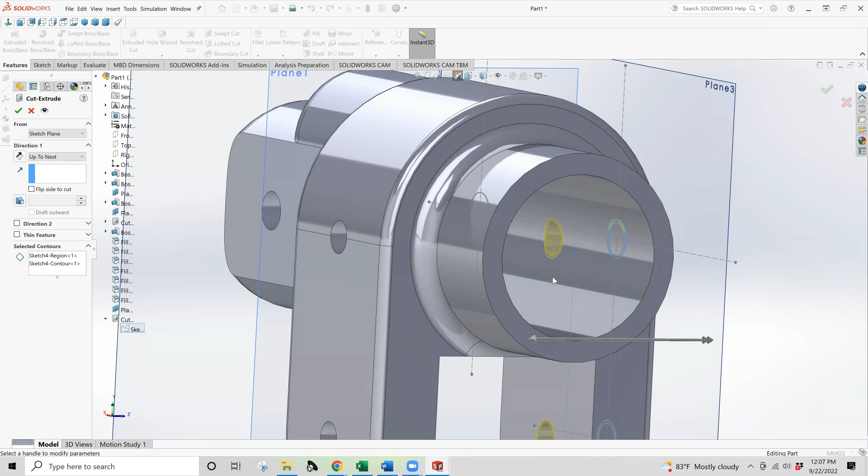And what that will do is, instead of a blind extrusion, that will create, there we go. Now it's actually displaying properly. SolidWorks being helpful again. That will create different depth cuts. There's occasions when you use this feature. It's not very often, but I wanted to show it to you guys anyway, so that you know that it's there and know what it does. Because you can't use tools to do cool things unless you know that it exists. So very different depths. And that's a very interesting way to solve this particular problem. So now our second cut extrude is done.

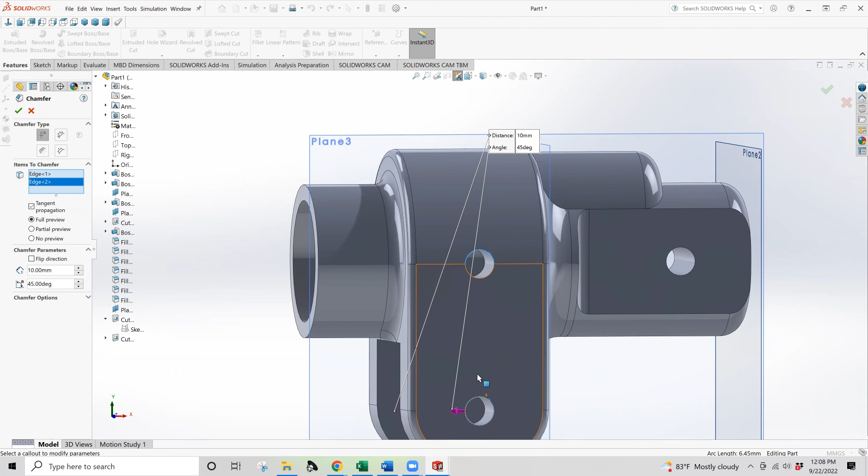The last thing we need to do is do our chamfer, which is under the fillet. And we want to select both these top edges. 10 millimeters you can see is a little bit too big. 6 millimeters looks, well, nothing like what we have. 3 millimeters is a little bit better, but still a significant amount of material we're taking away there. We can also change the angle of these.

But pretty soon you cut away most of the material and it can't really resolve the geometries. So we're going to reduce this down to 2. And we're going to go the opposite way of this angle. There's a couple ways that you can do that. One of which is you can set an angle and then go, oh, actually, I want the complement. Oh, it's not going to let me switch them.

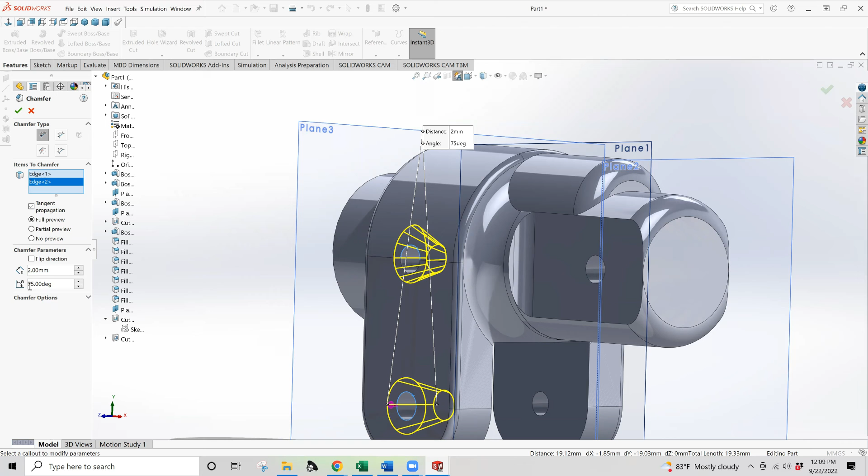Okay. So this feature, you do actually have to do that. I think it'll let you flip the angle. Yeah. So it will let you change the direction. There's an asymmetric thing we're going to do for the other one, so I'm not going to do that here. So 75 degrees is actually about what you have in the countersink for a lot of these.

All right. So now let's take a look. Does our example here look like what we have in the drawing? I would say that's pretty close. All right. So now, in order to modify the part for one more aspect of strength, I'm going to show you one more thing that we can do that's kind of a neat feature here.

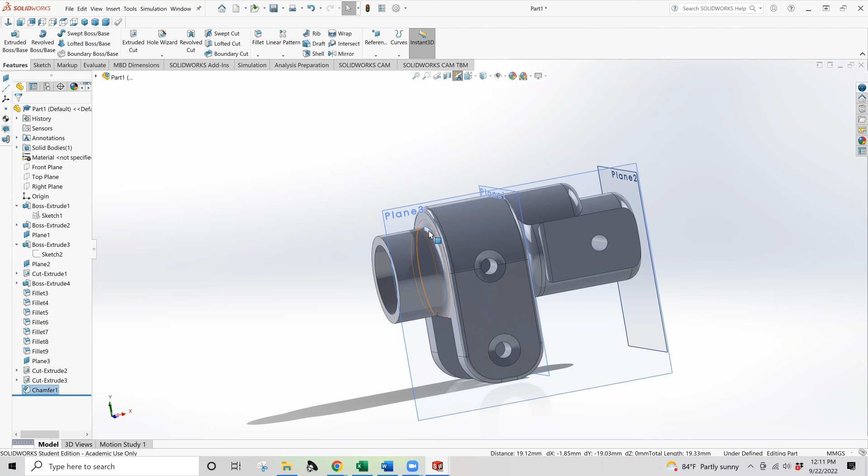And this will help to make this part stronger and create less of a stress concentrator so that this collar won't have a tendency to want to just split along the center the first time this is wind loaded, and there's any kind of moment applied to twist or torque this particular bar under wind loading. So if we go to select that feature, we see which fillet it is.

I want you guys to play around with a new aspect called asymmetric. And I want you to think real quickly about what that looks like and how that operates for you. What things can you do with it? What things can you not do with it? And what kind of asymmetric details can you actually include? So what do you guys think?

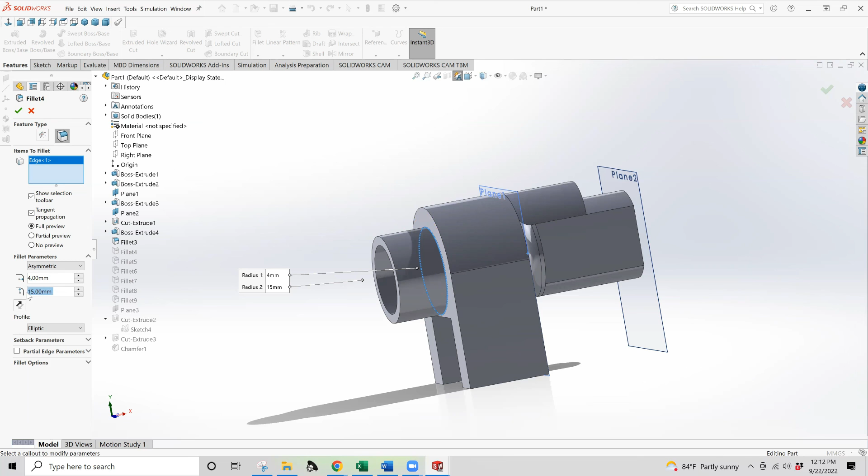We can do asymmetric. What can we change? So we can change the radius on one of them to be 5 or 4 or 3. In this case, because we have a 1 millimeter radius, I'm going to do 4 millimeter. And then for this one, I think I can do a radius of, let's see, I'm going to have to dial that back. It's only going to allow me a radius of 12, I think is the max. All right, so this gets my material to be a little bit thicker.

There's a couple different profiles that you can pick. This has to be between, so a rho of 0.95 versus I think 0.05 was the minimum. So that's a straight conic type section. Then there's continuous curvature, and you can change the direction of the asymmetry in the profile.

But here, there are a couple other things that you can include, but this allows you to get a little bit more material and make it a little bit thicker overall. So I'm going to go ahead and do that. But I'm going to reduce this again 1 more millimeter. So I'm going to say 3 millimeters. And I'm going to go back to the conic section at 0.05. I'm going to go back up to 4 millimeters.

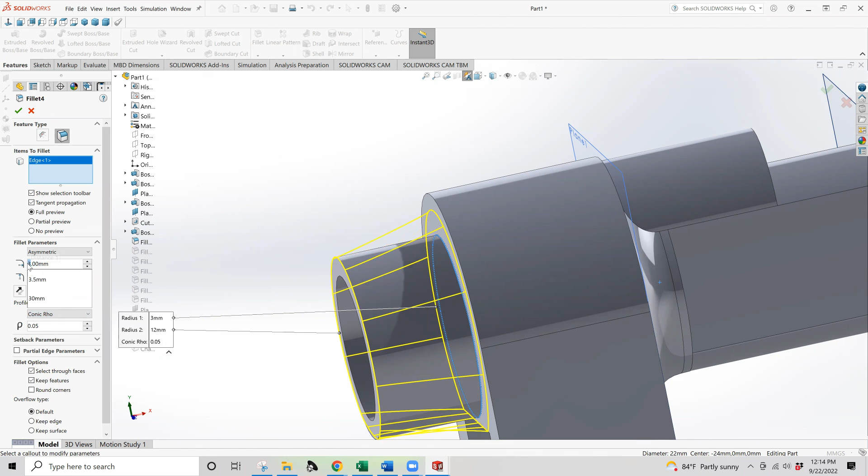So this effectively turns it into a chamfer, but at 0.05, what's 0.1 look like? Just a slight curvature. I want it to be very much on the low curvature side. 2.5. There we go. 2.5 might be about right. So 0.25. So that allows us to get more material at the back without changing that base geometry, and does so without disrupting some of the other form and features.

You can, in this case, go a little bit beyond that and say, I actually want to use the 5 millimeters here all the way to that outside edge of the part. And then that still won't affect that top fillet. You can still have that exist as a 1 millimeter fillet because it's just transitioning one geometry into another.

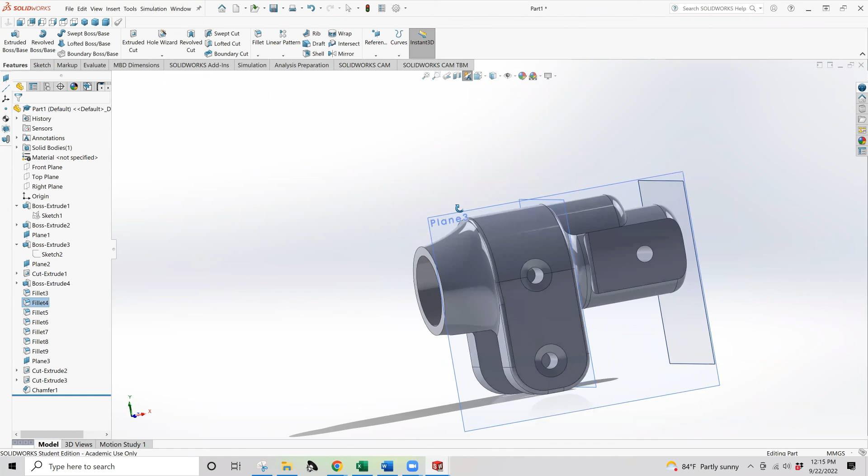But this gives you a significant increase in the strength of that part without creating what originally was a high stress concentration, where you'll be able to maybe hear by hand, by just compressing the back, I can get it to flex and creak, which is not going to work well if you add a lever arm and wind loading. So this is an area where you'd need to reinforce for a 3D printed part.

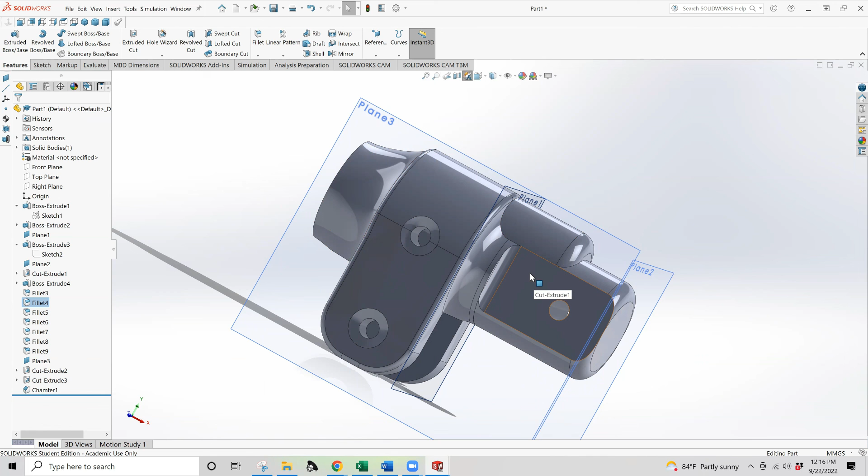The other components of geometry here, not so much. The collar is already pretty thick, so it's going to be pretty strong overall, but now you've fixed some of the weak points that the 3D printing would create for this geometry. And this will be significantly stronger as an end part. So I think this will cover all of the bases for what we're trying to do in this particular part. So I'll go ahead and pause here and then check for questions and see what areas you guys are stuck on.